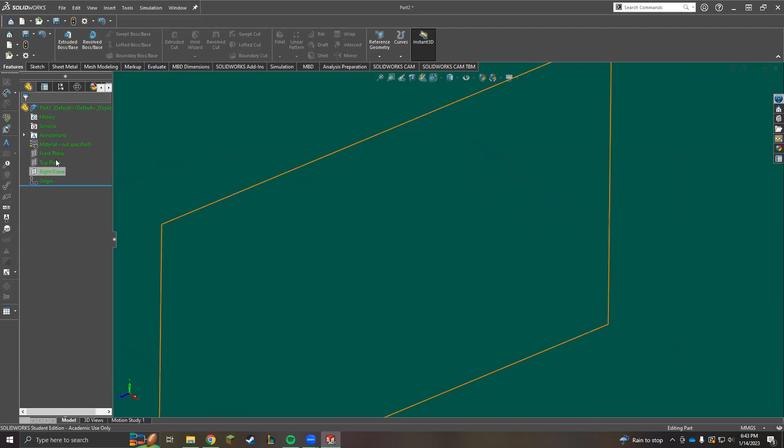So to start off for building the battery bucket, I'm going to want to sketch on the top plane. So I'm going to click on the top plane and go to Sketch tab and click Sketch. Also, remember that I'm doing this in the metric system. So come down here, click on here, and click right here to make sure that you're on the metric system for millimeters.

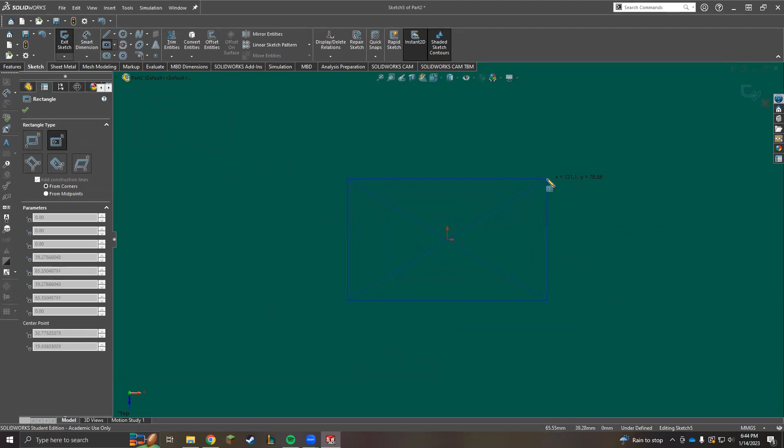So to start off, I'm going to click this feature right here using a center rectangle. I'm going to attach it to my origin, and I'm going to make the length of this box to be 71.5 millimeters. And I'm going to be making this height of this battery bucket to be 51.5 millimeters. Now I am going to go to my Features tab, and I'm going to extrude this upwards to 12 millimeters.

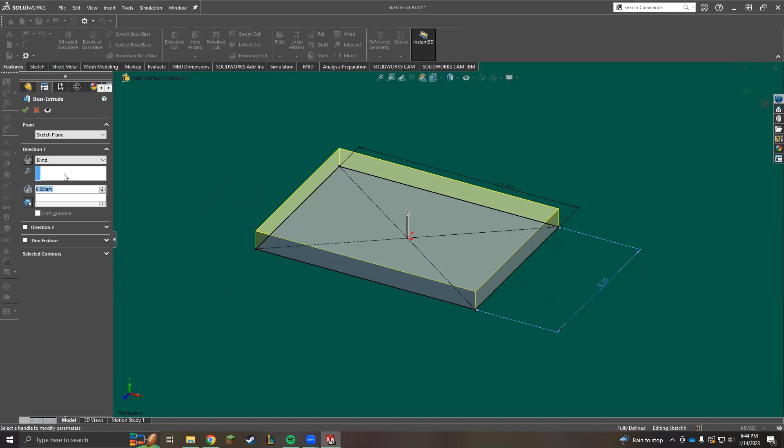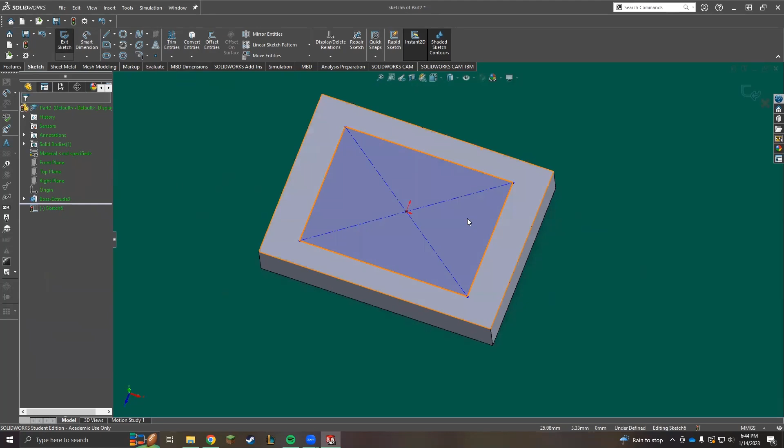Now I'm going to go back to my sketching tab. I want to sketch on this face again because I want to create the hole for this bucket. So I'm going to click on this face, click Sketch, click on Center Rectangle again, draw it, and center myself. Now I want to make the length of this hole to be 70.5 millimeters. And I want the height of this hole to be 50.5 millimeters.

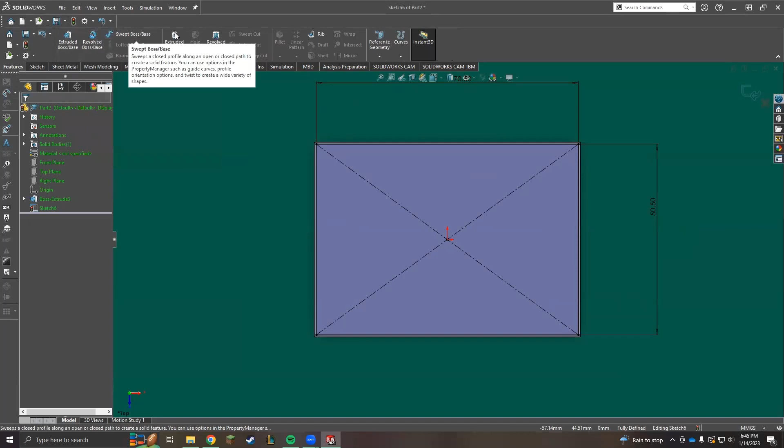Now I'm going to go to my Features tab, make a cut so that I'll have my hole. And I'm going to cut this a depth of 11.5 millimeters. So now I have a bucket that has a 0.5 millimeter thickness on all of its sides.

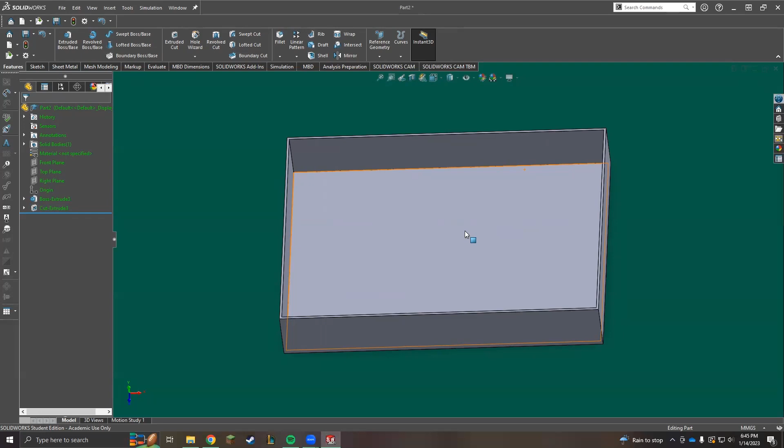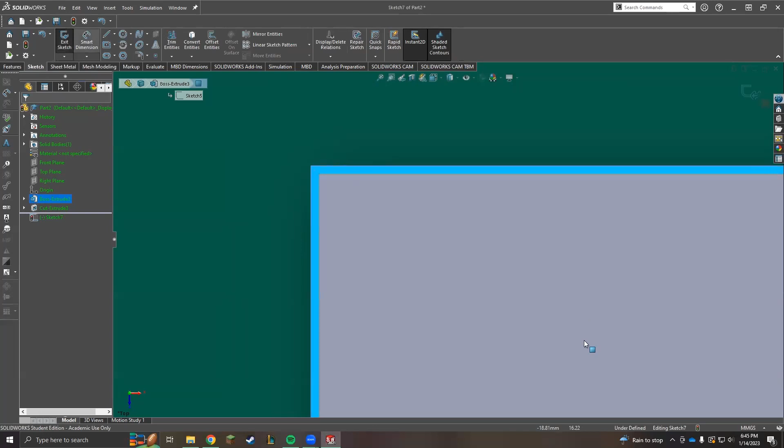After that, I want to add an edge right here so that it can hold on to a chip. So again, I'm going to center myself right here. I'm going to want to click on this face right here. And I'm going to go to my Sketch tab, click Sketch again. And for this edge, I know that I want my rectangle to be the length of the box. So I am going to use the corner rectangle, and I'm going to attach it to this corner right here and draw it to the length right here.

And it's okay if you drew this rectangle a little bit smaller or bigger than what it is, right? So if it's like this, or if it's smaller like this, we can always fix that. So right here, I don't have to worry about lining up this edge to the length of the bucket anymore because I already attached this rectangle to this corner right here. So it's locked in place. But for this side, I can control click this line and control click this edge right here and line it up by adding a collinear relationship.

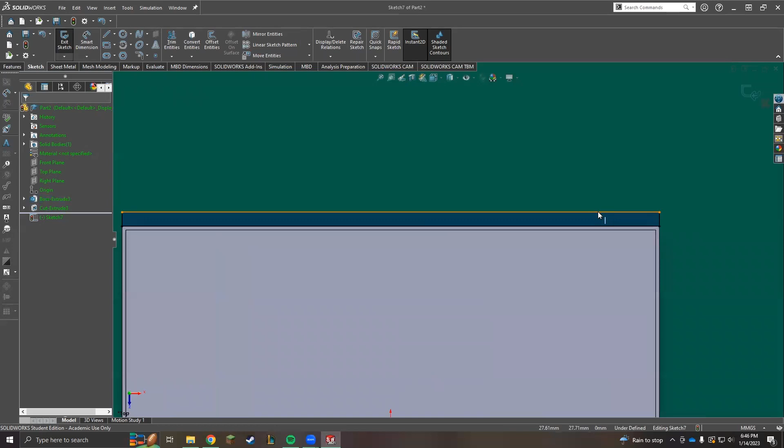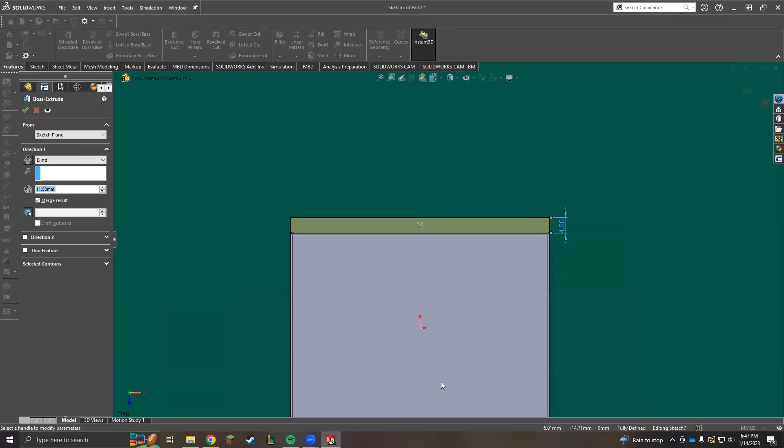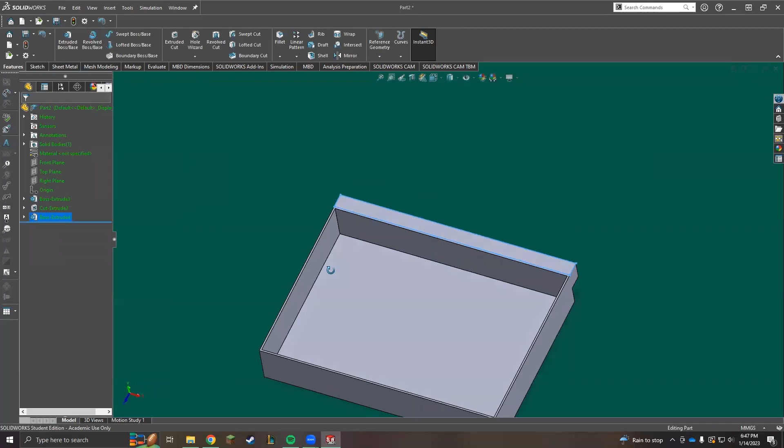And for the height of this edge, I want it to be 4.2 millimeters. So smart dimension, and I want it to be 4.2 millimeters. Okay, cool. Now I'm going to click Features, extrude it. So now I want to check where it's being extruded. It's being extruded upwards right now, and I want to change that direction. So I'll change it to this way, and I want to extrude it 6 millimeters. And make sure that the merge result is checked. So click check. So right now your part should look something like this.

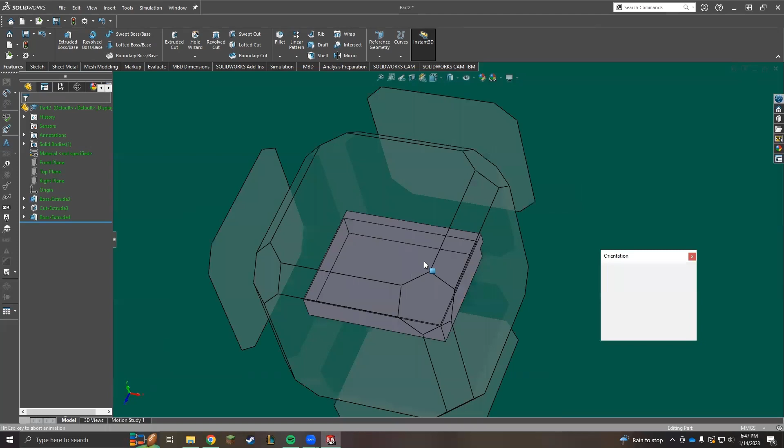And I want to add a hole to this edge right now because I want a place to put the chip on. So again, just center myself. I'm going to be sketching on this face again, right here. Click on this top face, click Sketch. And to do this, I'm going to make an infinite construction line again, which will help me later on. And I am going to draw a horizontal infinite construction line somewhere about right here.

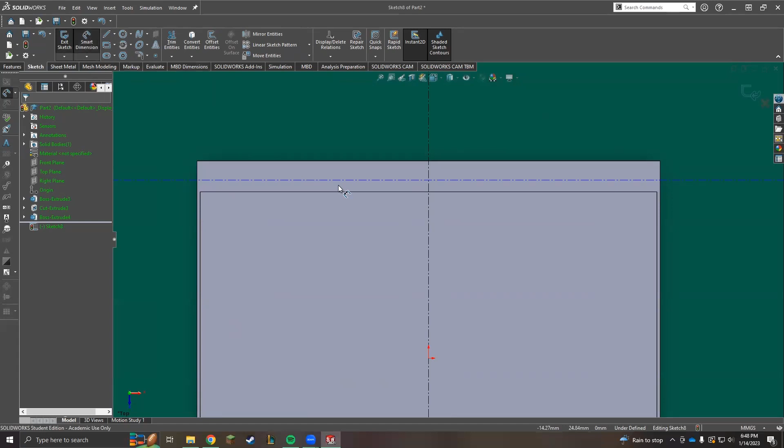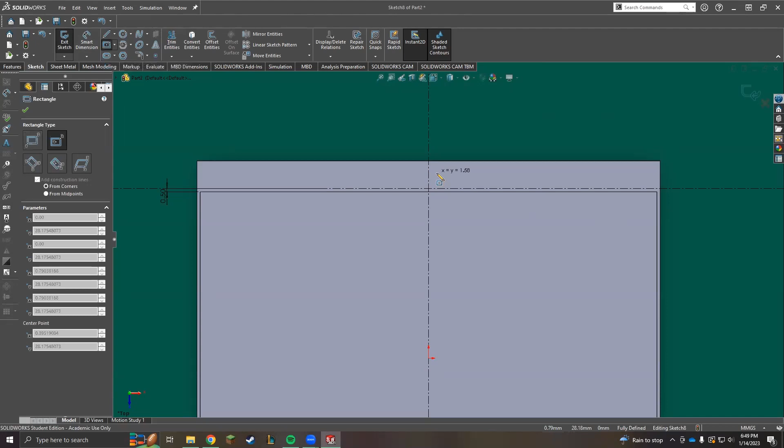Okay, so to keep the original thickness of this battery bucket, I remember that the thickness of the walls all around the bucket is 0.5 millimeters. So I'm going to smart dimension this from the edge to be 0.5 millimeters. Okay. And now I'm going to draw a center rectangle right here.

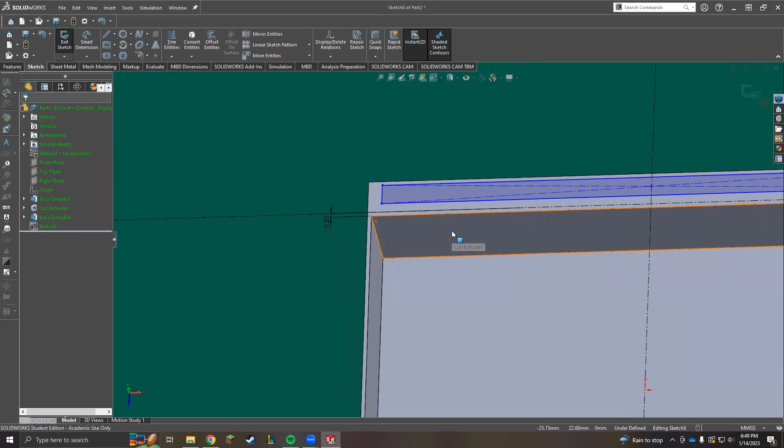Okay, so because this is a rectangle that's going to be made into a hole, I kind of want to line it up with the edges of this hole right here, right? So if I take a look, this is the rectangle for this hole, and I want to line up this rectangle, which I'm going to be making into a hole. So I want to line up this edge to this edge, and we do that again by adding a collinear relationship between these two lines, by control clicking this one, and then adding that relationship, and do it here also, control click, and collinear. Okay, so for the height of this rectangle, I'm going to make it to be 2 millimeters.

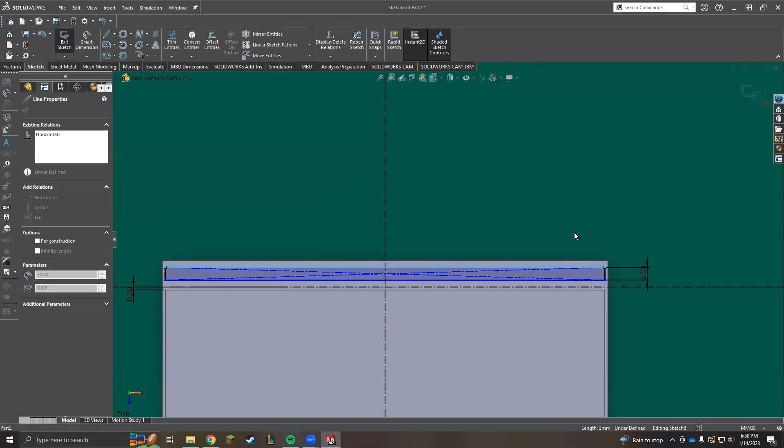So I still see that this rectangle is still blue, and I am unsure of why it's still underdefined. So I could just click on it, drag it a little bit, and I can see that it could still move up and down, but not left to right, meaning that it's fully defined for its horizontal position, but not its vertical position, right? Also, if I try pulling on the rectangle, none of its dimensions would change. So the dimensions are set.

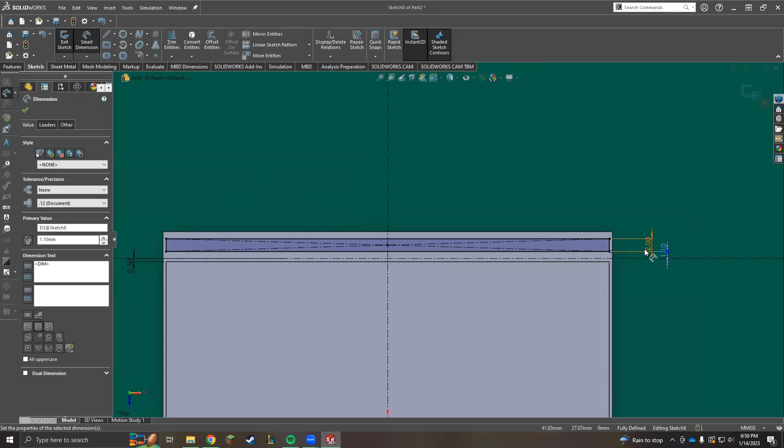So to set that vertical position, I'm going to click this bottom edge right here, click this construction line, and I want this distance to be 1.1 millimeters. Now you see that this is fully enclosed because of the blue highlight, and it is fully defined. So I want to go to my features, make my cut, and I'll make it all the way through. All right, so now your battery bucket should look something like this.